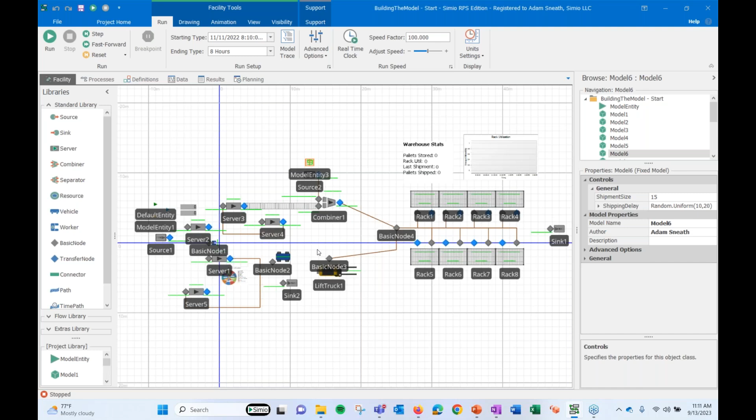Wonderful. All right, so we've got a relatively simple system here with some upstream processing activities, downstream storage areas with our rack objects, but you can see that I haven't done much to animate this. So some labels and status plots have been added. I'm not going to cover those today because those will be covered in our next solution series that Kiara is going to present. So I think they'll be a nice complement to each other, especially with the new chart designer features we've added.

So I won't cover those today, but I think you'll hopefully be impressed by the end of our session in just 20-30 minutes how different this model will look, because we're going to add animation to a lot of the objects, some of the entities, workers. We're going to mess around with the queues. So we'll do a lot here in not too much time.

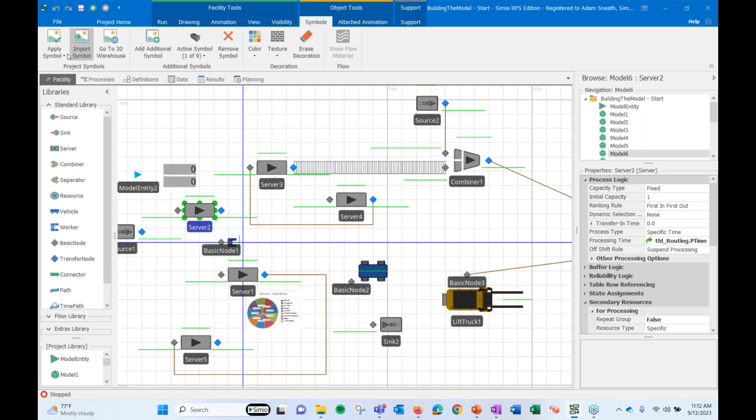So first thing I want to point out to you is these ribbons at the top, symbols and attached animation. You'll notice that those don't always appear, but when I click on an object, I see those appear. So to get us started, we are going to add some skin to servers 2, 3, and 4 from our built-in symbol library. Select each object, go to our symbols ribbon, apply symbol. We'll do a lathe, a mill, maybe we'll call this a finishing area, and then you can adjust the size of these symbols independent to the attached nodes and queues, so you can resize those as needed.

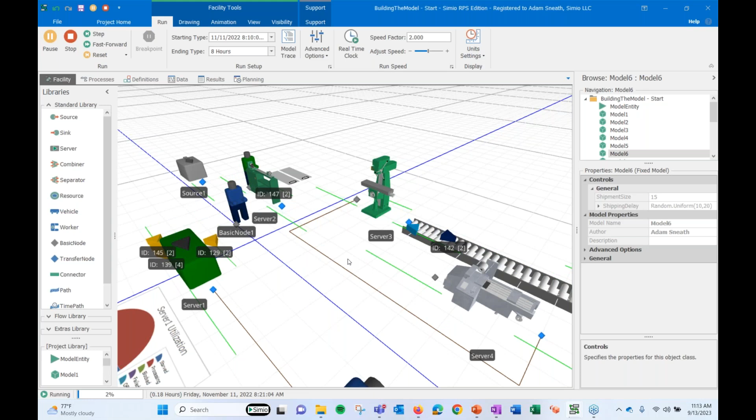So already just with a few clicks, we've gone from the gray box, the standard server, to a work area that looks like a machine or a piece of equipment. And to really illustrate this, I've gone down into 3D just by hitting the 3 key on my keyboard. So you can quickly toggle between 2D and 3D with the 2 and 3 keys. So now that we've got realistic looking equipment, our Lego block workers look a bit out of place. So next we'll take a crack at the workers and add some animation to them as well.

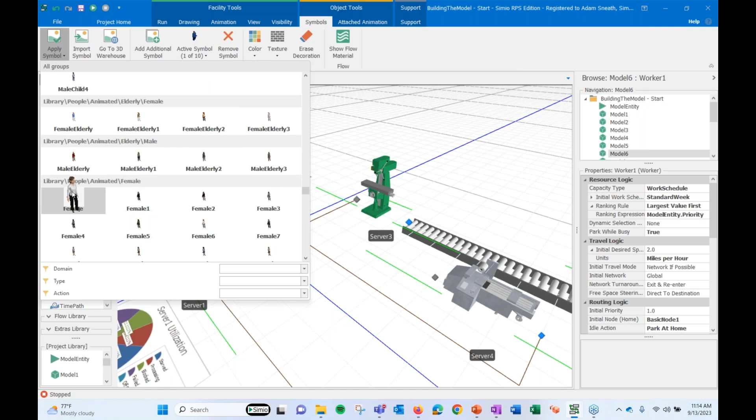So same workflow, I'll select that worker instance, use my symbol library, scroll down towards the bottom, and I want to point out that there are 2 flavors of symbols for worker objects typically. You have these categories that say animated, and then you'll have a larger category that's not animated. We're going to use animated, and I'll show you what the impact of doing that is. So we'll grab a human symbol here from one of those animated categories, resize it a little bit, and let's just run and see what happens now by default.

I can see the workers' feet are really moving while they're walking around. So that's the difference between those animated human symbols and the non-animated. Non-animated, they would just shuffle about without their feet actually moving. So the animated symbols are a nice way to get a more real feel for those workers moving around through the facility. And what are they doing in the model right now?

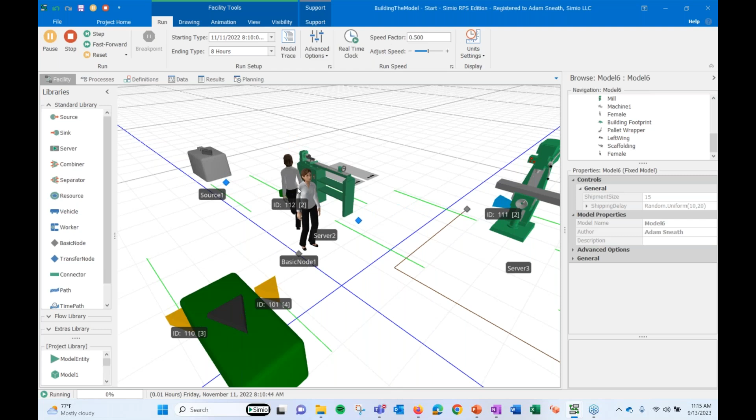So I have this server 2 set up to request move for those workers to the input node of server 2. I also am using an option called park while busy. That's really nice. So you'll see when more than one worker is required, they'll stack on each other. And I only have a capacity of 1 there right now. So let's change the capacity to 2. So now we can run 2 parts at a time, each part requiring 1 worker.

And I'm going to adjust now this parking queue on the input node of the server. There's this built-in parking queue, and I think this is a feature that maybe is not widely known about. So when I select that input node and hover, I can see: automatically animate the objects located in the parking station contents queue. If you wish to animate the objects somewhere else, turn off this option and use the draw queue option instead. So we're going to do just that.

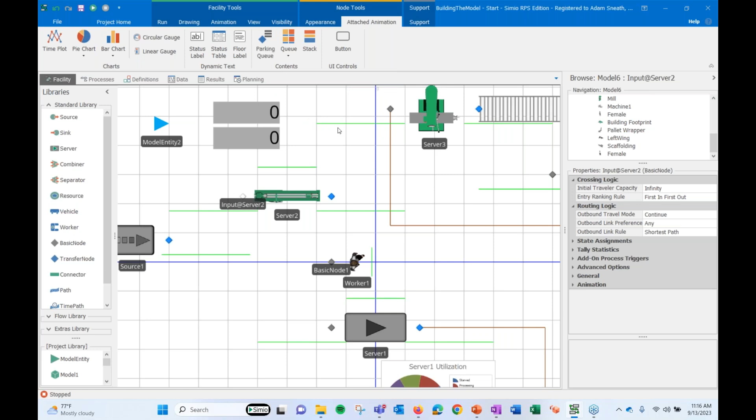You see it's gray when it's turned on. When it's turned off, it looks like the rest of the buttons on the ribbon. And I'm going to use the Queue button to animate ParkingStation.Contents. I'm going to draw this just above the work area. We'll move our labels a little bit out of the way. And I'm going to use the oriented point option for this queue, so I can control not only the position of, in this case, the workers in that queue, but also their orientation.

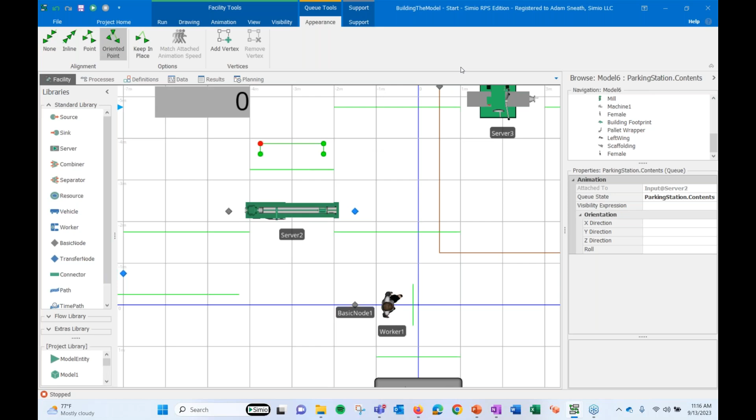Now we have a detached parking station where our workers will sit and face the workstation as they're working. Another thing I want to point out is this visibility ribbon.

We'll run the model in a second and see that result. But another thing you can do, if you feel the queues are detracting value from the look and feel or other things like nodes, you can toggle anything you want on and off from the visibility ribbon. Aptly named, it really just affects the appearance. You're not changing the physical or logical behavior of the nodes or the queues, just masking them from the facility view. So we'll leave them on for now.

Now we'll run the model and see. Kind of cool that our workers really now stand in the queue facing the equipment.

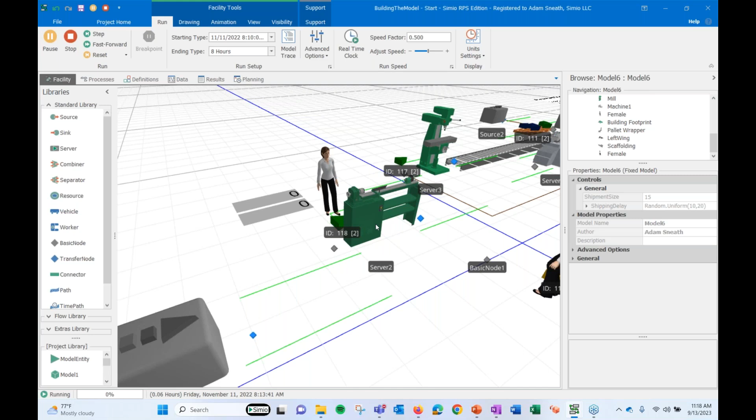That can be a really nice way, especially as you get into custom object development. You could save that object with that queue configuration and rapidly scale up your model. If there were 10 lathes, you wouldn't have to do those clicks for each one. Save this off as a custom object, and then you can replicate it rapidly and efficiently.

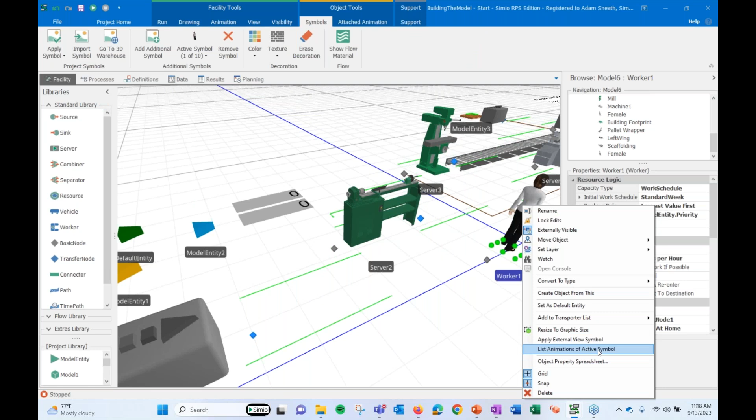All right, so we're making some good progress. Another thing I want to mention is that these animated symbols have assignable actions, or we call them animations. So if you want to get into detail as to what your workers are doing, maybe during different steps in a task sequence or at different work areas, you have these options that are assignable. You can do it in process logic with an Assign step, using these indices to create different actions for those animated workers.

All right. So next, I want to point out that if you toggle the H key on your keyboard, you'll see a number of these camera control or lens control options. There's a full help document on this with a complete list of these options, and I'll cover some of them as we go along.

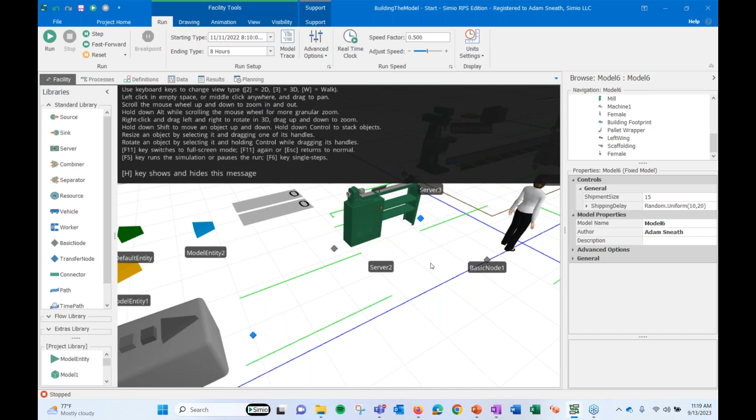For example, one thing you can do while the model's running is use the R key on your keyboard to create this rotating view. That may be a nice way to give a bird's eye view while you're starting your presentation, or at some point.

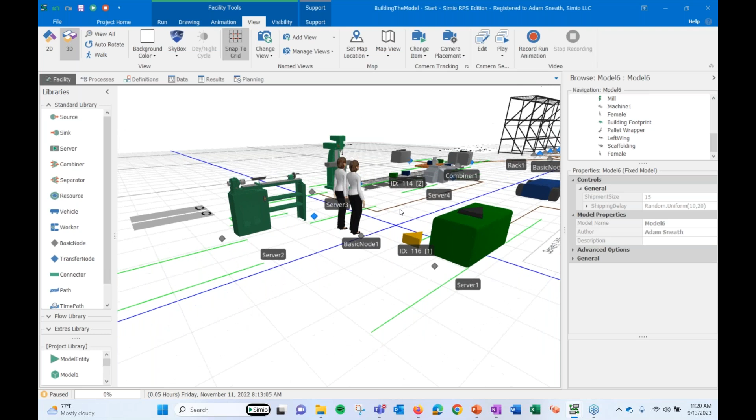Okay, so next I want to talk about a feature that I use a lot and think is really good, this idea of saved views. From the views ribbon, I have this category of buttons for named views. What you can do essentially is, once you've gotten your camera angled to a good position and you're seeing some of those toggles in real time, I can hold the control key and move up and down on this axis.

Once I've got it somewhere that I like, I can add this as a named view. I'll call it 3D upstream, and give it a hotkey on my keyboard. So then I can rapidly navigate through the model.

And I typically like to do a 2D overview as well, so we'll add a 2D overview. I'll map this to the O key on my keyboard, and now I can seamlessly jump around between those two views. I know sometimes over the screen share this is going to go a little laggy, but hopefully it looks as clean on your end as it does on mine. When you set this up, you'll see it's a pretty smooth transition. There's no limit to how many you can add there.

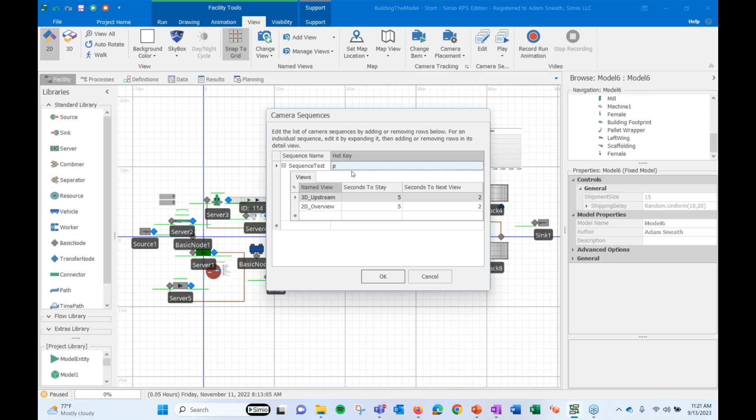And there's a nice companion feature to that where you can define a sequence of those moves. So you can create a sequence test with its own hotkey, and essentially what you do is specify the durations that you'd like to present each of those named views, or some sequence of those named views that you've defined. In this case, if I gave this a hotkey like P, when I hit the P stroke on the keyboard, I would spend 5 seconds on this view and 5 seconds on the next.

So it won't look like much with just two views. It'll sort of look like what we were just doing before, but you'll see that it transitions from one view to another, which can be pretty nice. Maybe if you want to make a recording, I think that would be a really nice feature, in sync with your talk track. You can spend as much time as you want in one area and then have the camera automatically move to another area using that camera sequence feature.

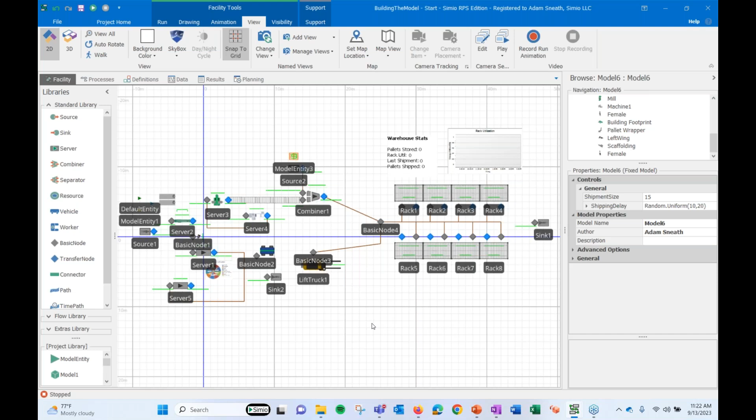Next, we are going to do a bit more with importing 3D symbols. So we'll tee up two scenarios here. I want to bring in a CAD floor plan, like a 2D floor plan, maybe a DWG file or a DXF file, so we'll do that first. And I also want to make this combiner look more like a pallet wrapper, a palletizing area.

Now, we'll imagine for the floor plan that I already have a file on hand, so we'll assume that we have a file. To bring it in, I'm going to go to Drawing, Import Symbol, and navigate to the folder where I have it. I'll select that building footprint, DWG in this case. And maybe if you know more about CAD than I do, you might mess around with these options, but I almost always just leave the default settings there, hit OK, and we'll see that import occur.

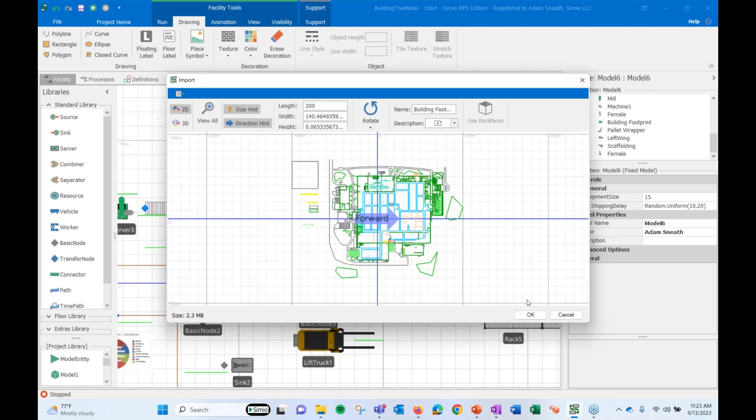Then I get this nice dialog to establish the dimensions of that symbol. This is a great way, I think, to start your project, because already you set this to scale, and then you have a clear canvas to build your objects on. So I won't spend a ton of time here to get this too perfect, but we'll just set up the racking near the shipping area and say that this is good enough for now.

Another feature that I want to mention is that when you bring this in, it's right on the origin, and actually the y-axis in Simio. So the axes in Simio are X to the left and right, Z up and down, Y you can think of as into or out of the screen as the y-axis, or in 3D, sort of up or down. So when I bring this in, it's on 0Y, so it can compete with other things, especially in 2D.

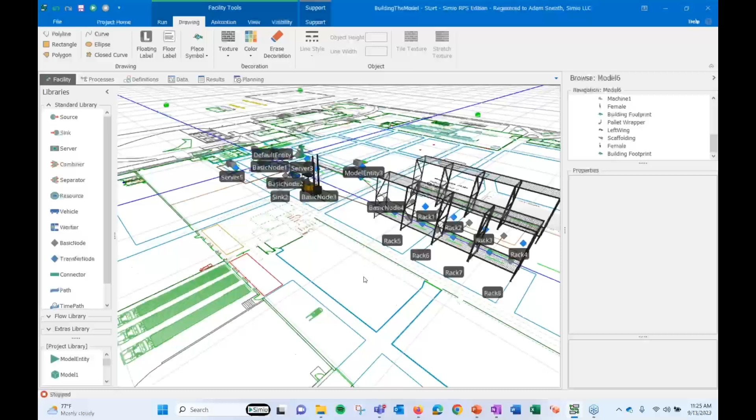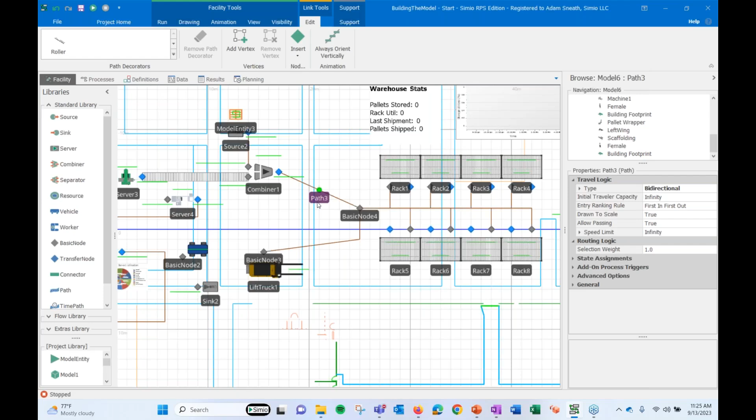When I try to click on other things that lay flat on the grid, it can compete with those clicks. So what we're going to do is go into 3D and hold the Shift key on my keyboard and just lower this slightly below the grid. The more opaque that it is, you'll be able to see the grid lines actually going over it. Now, we'll just lower it slightly on that y-axis, and then you can lock edits. So now I can click around and that symbol will no longer move as I click the mouse and move on it. And now in 2D, I can comfortably select other things that are sitting there right on the grid.

All right, so we've got our floor plan, and next we want to enhance our combiner to make it look more like a pallet wrapper, palletizing area. And again, maybe some customers that I work with have CAD groups within their organization, so they can outsource creation of 3D symbols. Some customers already have a nice library of them, but we'll imagine in this case we don't have a pallet wrapper symbol.

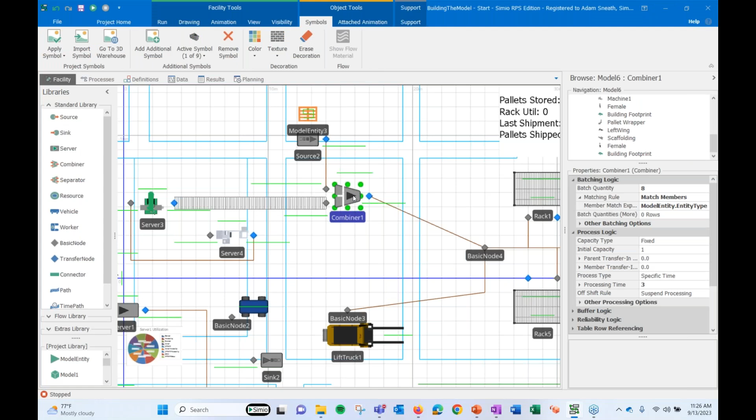So there's a really nice resource online that's free. We can use 3D Warehouse by SketchUp. In this case, we'll search for a pallet wrapper, navigate to the models tab there, and we can download a free symbol online, pallet wrapper. So I've already done that, and what we're going to do now is select our combiner to import a custom symbol.

So we're moving out of that standard built-in symbol library. We're bringing in our own custom pallet wrapper. Give this the right size, and select OK.

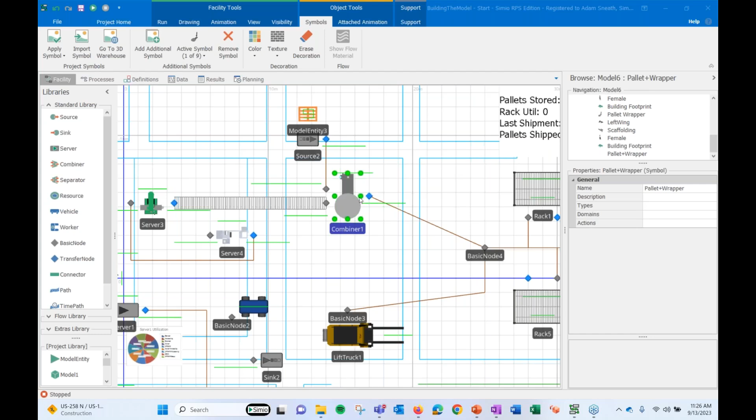Now, if you ever want to change that geometry, so maybe we have several pallet wrappers and you want its default geometry to be a different size, you can go back. I want to mention this because it's a little bit buried here in the navigation window. A lot of our clicks are on the ribbons or the tabs in the home screen, but when it comes to symbols, you can select the project here from the navigation window, go to symbols, or you'll see them here on the side. So navigation window is our hub. And then you can select that symbol, edit symbol, and edit its specific geometry to resize those initial dimensions if you need to.

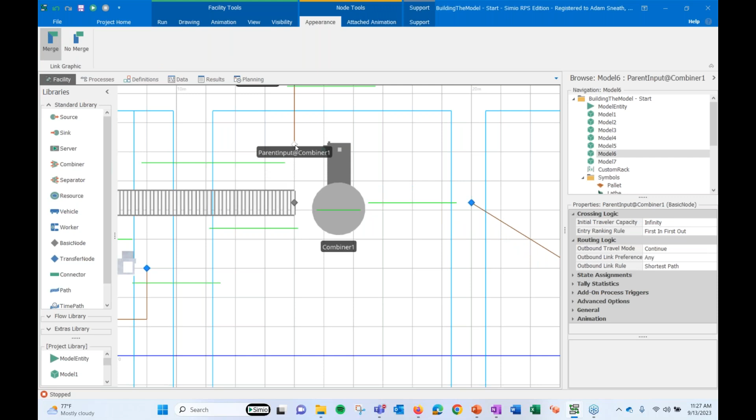We'll go back to the model. Our next step will be to adjust some of these attached queues to further bring this area to life. I'm going to bring the processing contents queue down and center it on the base of our pallet wrapper, bring the output node over to the right, maybe make this more like a staging area, and bring my input buffer onto the conveyor.

So let's see what we did, see if we made any mistakes. I feel okay about it so far. We'll speed things up a little bit and see if we can start building some pallets. You see them being built up gradually in that area where the pallets are staged. Then we're ready to wrap - they move onto the deck and then take off. So without doing a lot, we've nicely enhanced the look of this area. This looks fairly realistic just by doing a little bit there.

Maybe what we'll do while we're here is add another view. We'll call this pallet wrap and give it the X key on my keyboard.

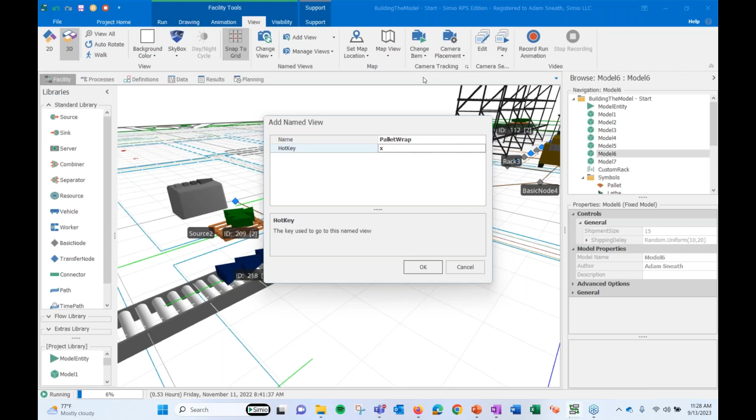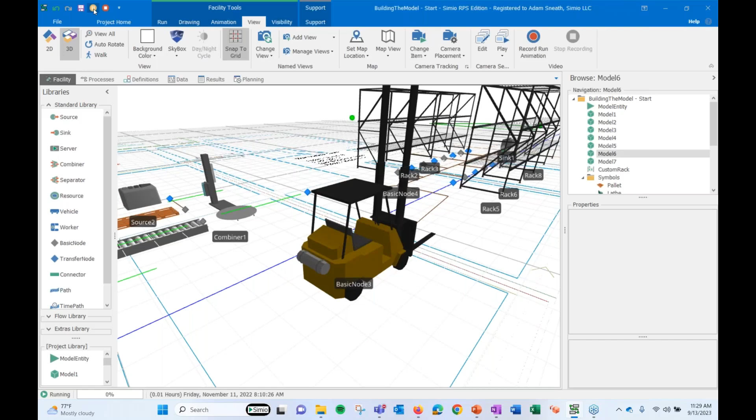This next feature is really sort of fun. What we'll do is select our forklift. This feature applies to anything that moves about through the model, such as workers, entities, or vehicles in this case. While the model is actually running, we'll right-click and toggle this trackable with camera option. It's already toggled on, but if it were off, it would look like this. We'll toggle it on, and now we can use these camera tracking options. I just think this is really cool, and maybe not widely known.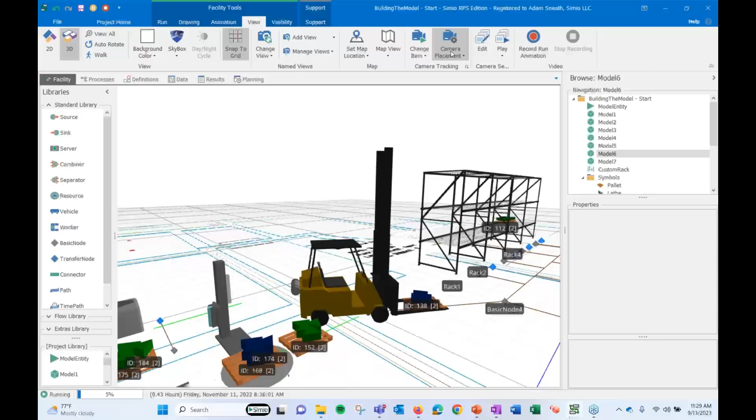Give this a second to run until our forklift does its first move, and then we'll look at the different options for tracking along with this object. I saw a really cool model of a roller coaster that actually took you on a ride by following behind the entities. So you can use follow behind, watch from a distance - I'll try that one so I know how to look. Oh, pretty cool too. Really like these features, and you can switch between different objects. That's just sort of a fun, nice to have feature as well, that maybe you didn't know about.

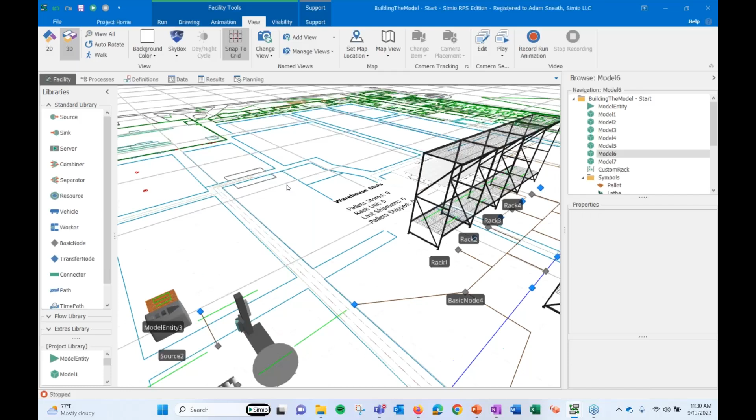Good deal, so we'll use our hotkey to zoom back to 2D. Next we're going to do a bit more with static symbols, so I think you'll enjoy this. What we're going to do is bring our products down here a little bit. We're going to create a little more runway in server 1, this server 1 area, so we'll bring this down, just create a little bit more space for ourselves. Put the home node for the workers over here; the worker instance I can kind of stash somewhere else on the side just to get them out of the way.

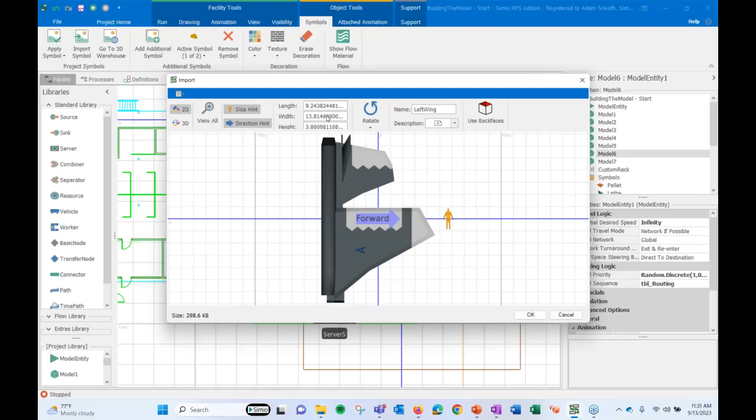Instead of just the triangle, I'm now going to import another symbol for my entity. So I go to Symbols ribbon, import symbol, and we're now going to build airplane wings. You can see a bit more of what I can do here - I can sort of rotate it, I can stand it up along either axis. I want to have just the flat side facing up in this case. Again, none of this is set in stone - you could always go back and adjust if you need to.

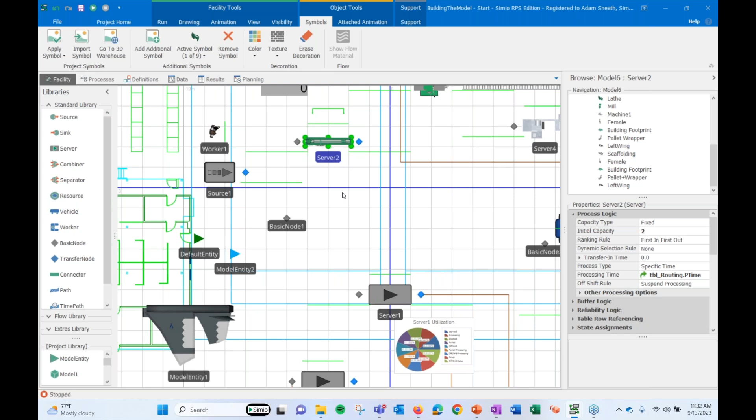So we are also going to add some scaffolding. This will be our first, what I call a static symbol - well, actually, our floor plan was our first static symbol. So we'll be adding another static symbol, meaning it's not attached to anything and has no intelligence, so to speak. Simio is simulation with intelligent objects. A lot of what we've done so far is animate a server, and in doing so, we haven't changed its behavior - its intelligence still has the same brain, but we've given it a different outfit. The static symbols are purely aesthetic; they have no function in the model. They're just a symbol. I'll show you how we can always tell whether something we're looking at is an object or not.

But first, we're going to bring in this scaffolding. We'll give it a made up, say 5 meters, and bring this in. You'll notice that when I click on that symbol, I don't see any properties, and that's how I can tell the difference - there's no object type next to that properties indicator, whereas the servers say properties of server object.

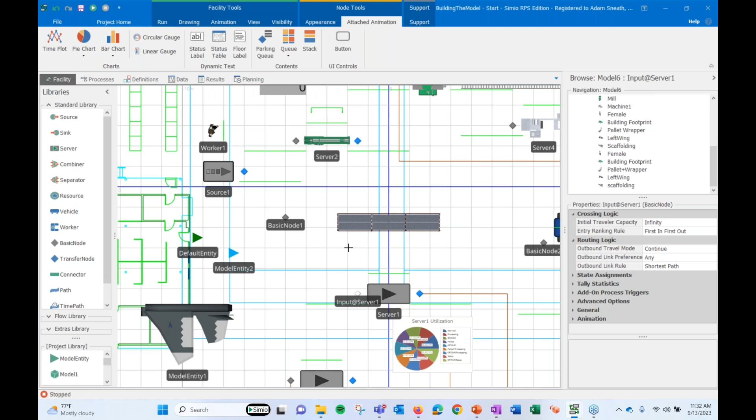Next, we're going to animate the parking queue again, but with a bit more flair. I'll add a parking station contents queue here. We'll do an oriented point again, facing the server, and add another vertex.

Note that when you do this oriented point queue, if you had more than, in this case, 3 things in the queue, you wouldn't see them. So with this type of queue, you have to be mindful to add enough vertices for the maximum number of things that could be in the queue, or you won't see them. If there are more than 3 there, we wouldn't see them.

I need to adjust my task sequence a bit. I want to say that 3 workers are required for these tasks. We're going to need to add more workers so they can keep up. So we're doing a bit of modeling here too, just some quick changes. We'll say there are 5 workers, should be enough.

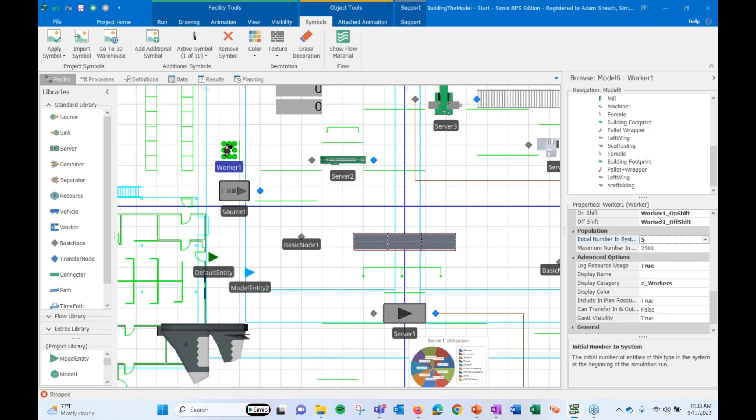Now what I want to do is move this whole queue up in 3D. I do that by holding the shift key and moving it up and down in 3D. I can do that for individual vertices as well.

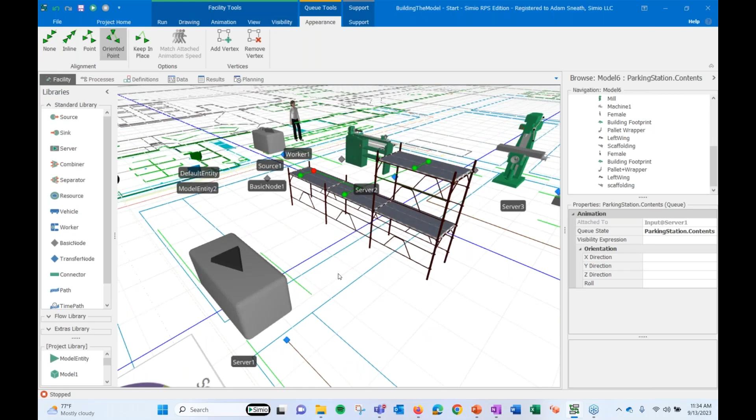And then you may have guessed what we're going to do. I'm going to place this on the scaffolding, so effectively we'll see our workers standing on the scaffolding, which will be pretty neat. I'm purposefully going to skip one step so we can see what happens.

Interestingly, we see our workers, servers seize, but where's the part? Looks like we're not doing anything. So another feature to be aware of, and this tricked me a few times, is...

You may need to resize your processing queue or your input buffer. As you make things bigger, as you make your entities bigger, they can get hidden in those default queue sizes. So just make sure as you make things larger, you also increase the size of queues to accommodate them.

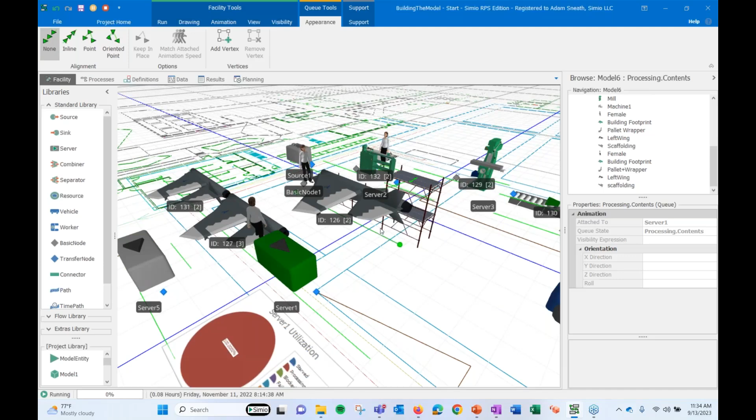So again, this is just a silly example here, mainly to show you the capabilities. Maybe while we're here, we'll save a view, and we'll call it 'plane wing with C'.

But yeah, some really nice features there. You could imagine perfectionists could take this to the nth degree, just by knowing how to work with these queues, bringing in static symbols. You can do a lot to mimic the real appearance of the system.

And already we've got a pretty nice model here. I mean, remember where we started? We've done a lot to make this feel more realistic, more engaging.

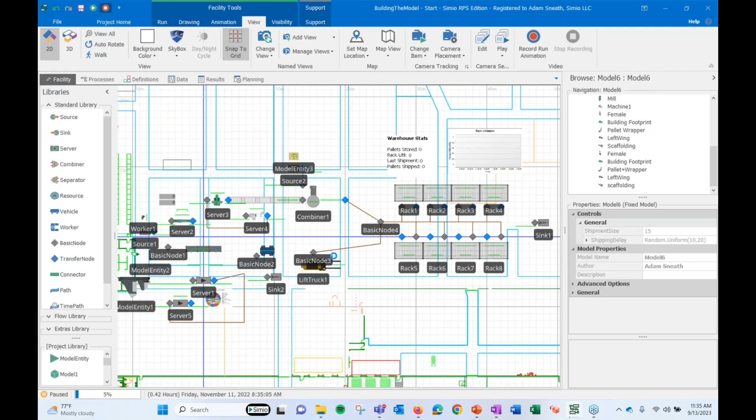Okay, last one's kind of a bonus. I'm not sure it's purely an animation feature, but I think it's pretty neat and definitely can affect the appearance. So bear with me for a second here.

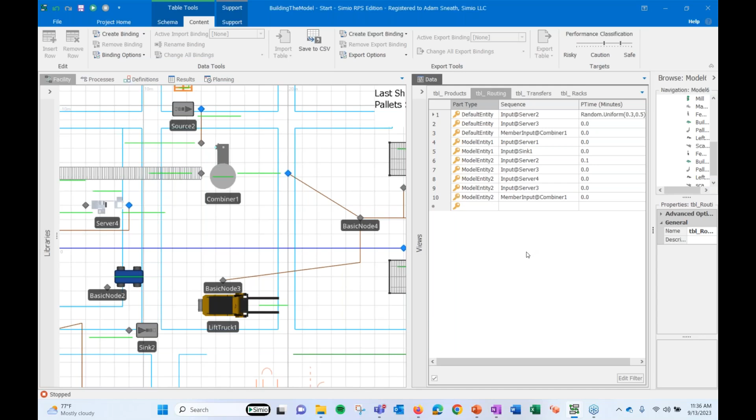When I do this, we're going to auto create links with vertices, with the goal of creating a curved travel path, or a travel arc. You could do this manually, but you'll see why auto creating has its benefits. It's more efficient, easier to maintain and scale.

So to do this, we're going to get rid of path 3. You're gone. And add a new data table, call this table 'links'. I'm going to add an object property column and 2 node property columns. I'll call this link name, start node with a lowercase t please, and end node.

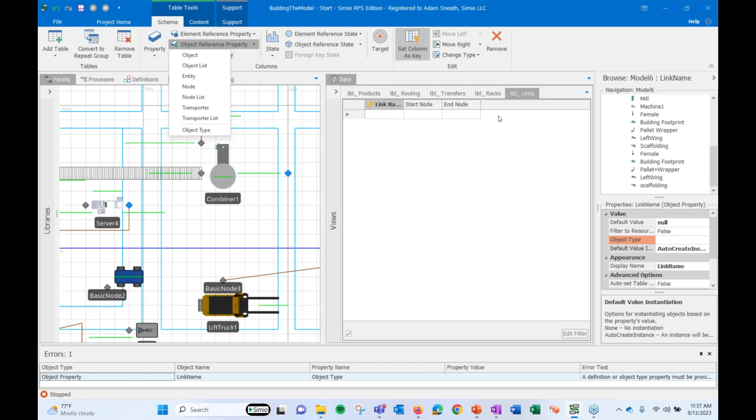Make this a primary key to indicate it's a unique identifier, or that the entries in that column are unique identifiers. If you've done auto create before, you know we have this special type of column I could add to specify object types, like these rows should auto create a server specified there, or basically for each row auto create the type of object specified in that special column. If I did that, I would map this entry to that column name, but for now I'm just going to say everything in this table is going to be a path.

To actually do it, I need to map the properties of this column to the other columns in the table, and I do that with just the column name syntax. Since I'm within this table, I don't have to do table name dot column name — it recognizes that I'm looking within this table for this information.

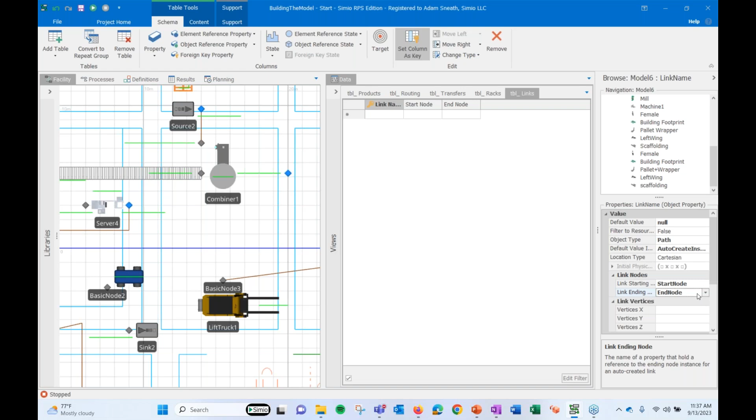And let's see what happens. So I usually start typing into the cell to get close to what I want. Then maybe I'll use the arrow keys on my keyboard to finish it out. And voila, once I give it a starting node and an ending node, it is created between them automatically.

The benefit of doing this is that you could be clever, or maybe write some code to build out rather large networks pretty easily. Maybe you're modeling a warehouse and you want to model your transportation lanes and your different travel paths throughout the warehouse. You could automate this data creation if you write some code or do something clever, maybe in Excel with a macro.

And to take this one step further, we talked about this idea of a curved path. We're going to add a table called table vertices with a foreign key property and 2 real properties that I'll call X and Z. We'll give these units of meters. And we'll call this link name as well. I tend to give my foreign key columns the same name as their primary key.

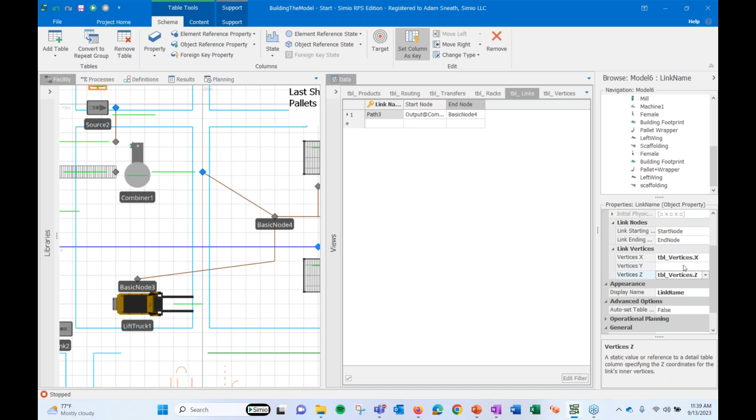Now remember that a foreign key is many mapped back to 1. So for each link, I'm going to define potentially several vertices. And to do that, I need one more mapping here. Now that I'm going to another table, I need the table name.column name syntax that we're using here. Okay. So now I'm telling the auto-created paths to reference this other table for their vertices. Finally, I need to set up my foreign key with the primary key table key property.

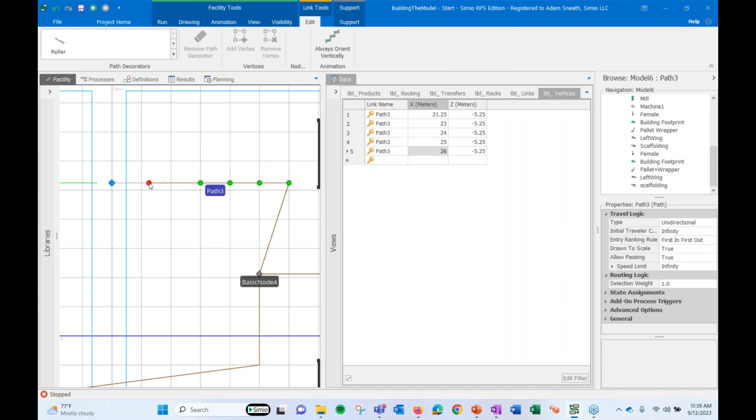And now when I drop that in, the default values there, 0, 0, I get this vertex over by the origin. And then, in this case, we'll just copy paste a handful of them. Maybe start to give them some offset there. And then click and drag, and you see the coordinates in the table update as well. So pretty neat. If you have any sort of curved conveyance, maybe there's an obstacle there that you want to avoid, you can do that through auto create.

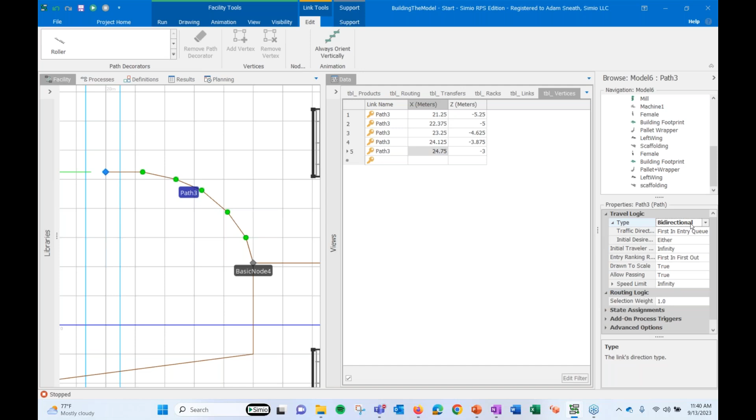And remember that when you auto create, you need to come back and reconfigure, unless you're auto creating a custom object that has saved non-default values. So basically, before I deleted this and recreated it, it was a bidirectional path. So now that I've auto created it, I need to go back and set it to bidirectional. I could also save this as a custom path, create object from this, so that each custom path is created with bidirectional automatically. If you have questions about that or you're not familiar with that, just reach out to us. It's generally called subclassing objects or custom objects, really great features as well.

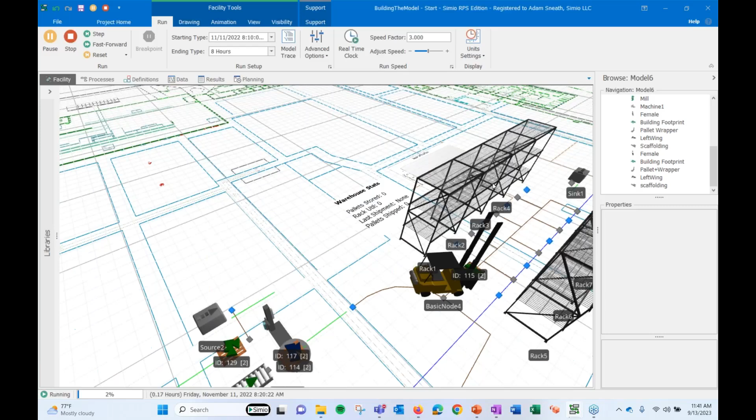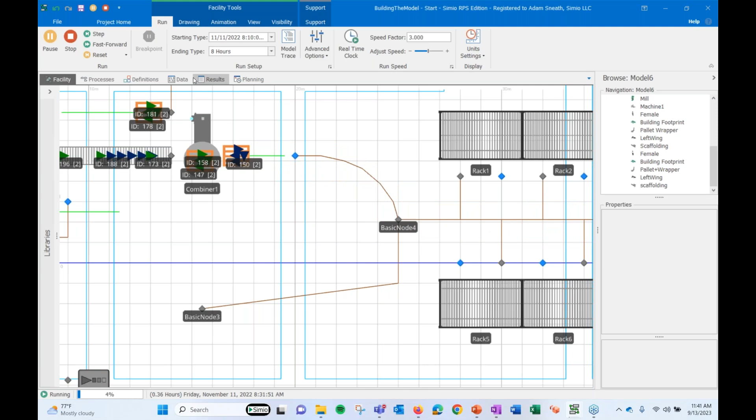So let's see, can I remember the hotkey? We want X for our pallet wrapper area. We'll bring the data tab back in, and let's see how we did. So once we build some pallets, we'll see the forklift now travel on this curved arc. So pretty cool. You could really do a lot with this. And again, it's in 3 dimensions. So if you had some sort of spiraling conveyance, maybe coming down from one floor to another, you could do that all by just getting the coordinates right. Or again, doing something clever with code or Excel to generate that data.

All right, and we're getting pretty close to close here. Just a few bonus topics. Another thing you can do is use the skybox feature from the views ribbon to add a backdrop. In this case, we'll add a warehouse backdrop. And again, just remember that you have a lot of those options to control the look and feel. So, control and scroll on my scroll wheel will go up and down like that. Shift and scroll will take me up towards the roof. So that can be pretty neat, or back down to earth.

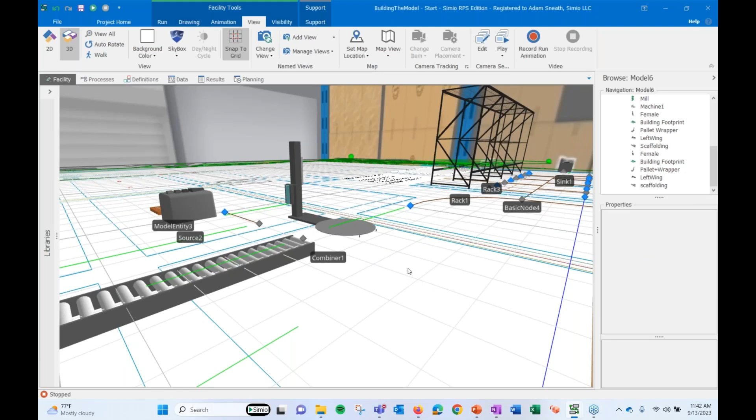And remember that we didn't cover today animation, status labels, and charts, because Kiara will be covering that in our next solution series. But hopefully you enjoyed this. Hopefully you can apply these techniques to some of your models to really make them sing.

For now, that's all I got for you. We'll just mention, for further learning, reach out to us. We've got good training resources online, also good help documentation in the software, so auto creating paths, for instance, is a SimBit. So if you wanted a refresher on that, search the help doc, search the SimBits for auto create paths with vertices. So a lot of good resources for you there for further learning.

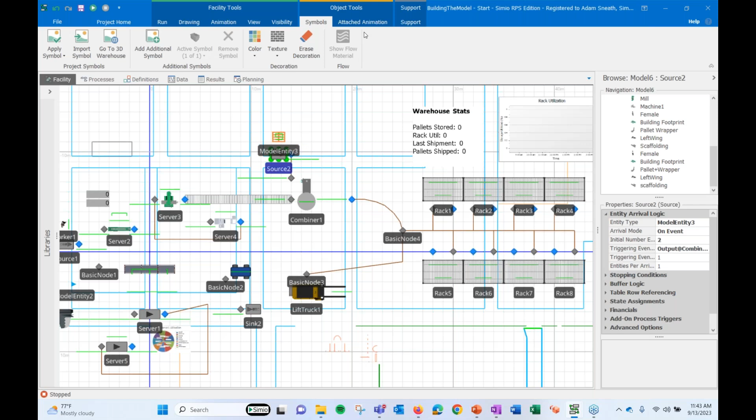So Adam, how do you access attached animations versus standalone animations? Good question. So we'll go back to Simio, and just definitions, right? Attached means that I've selected an object first and then applied animation to that object. So it's attached to that object. And when you ask how do you access them, well, by selecting that object again, checking out the symbols ribbon, you can see how it appears for the different resource states.

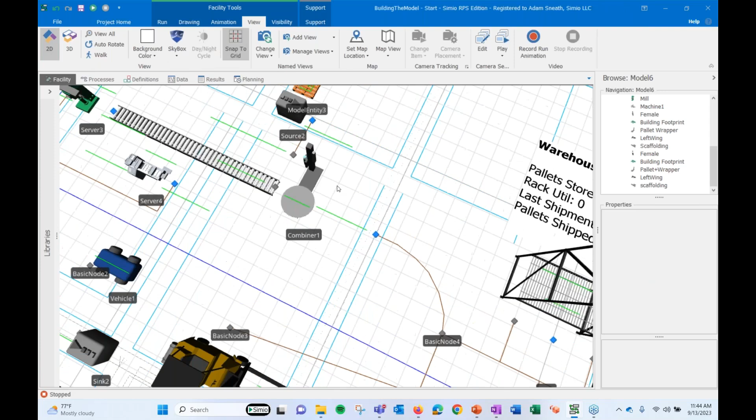So sometimes if I have failures, I'll further manipulate that attached symbol. So I'll switch to off shift or that failed state, and then maybe add some coloration, sort of like the default server, right? The default server turns green when it's processing. So the short answer for attached is by selecting that object again, right? Now the symbol is just a symbol. So the symbols I can access from the navigation window to resize them, do whatever.

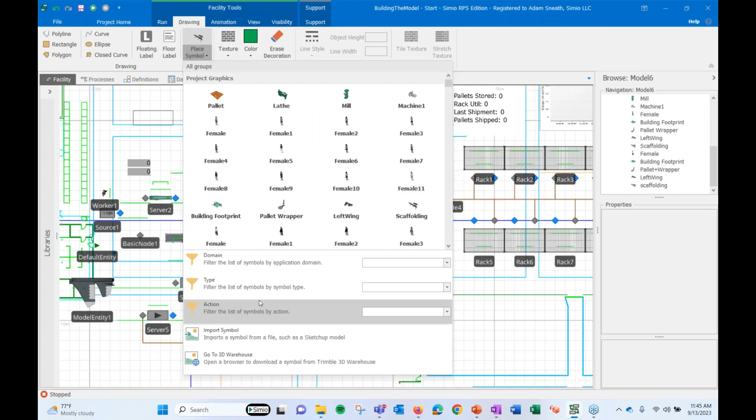The static symbols, again, just by clicking on them in the facility view, you can access them there. And to create them, you just click in free space from the drawing ribbon. You import that as a static symbol, like our floor plan and like our scaffolding. So hopefully that gives some clarification, addresses your question.

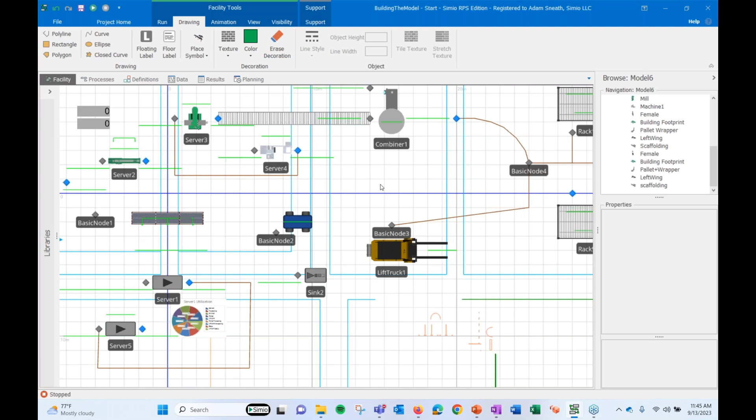Adam, can you have a path speed column as well? So if different entities use the same path, they reference that column to see what speed they should move. Yeah, awesome question. Getting on to what we call data-driven modeling. And the answer is absolutely yes. So a nice way to think about these auto-create tables is each row is analogous to the instance of that object. So in a non-data driven model, we're hard coding stuff on these objects. We're saying the speed limit of this path is 3, the speed limit of this path is 5.

But then I don't really have that in front of me. I did also want to mention the properties spreadsheet, which is a nice way to get that in front of you in a tabular view. So now I can see all my paths. I can also use this to multi-select things. So if you have an action you want to do on all your servers or objects of a certain type, I want to mention the property spreadsheet. I think this may not be well known.

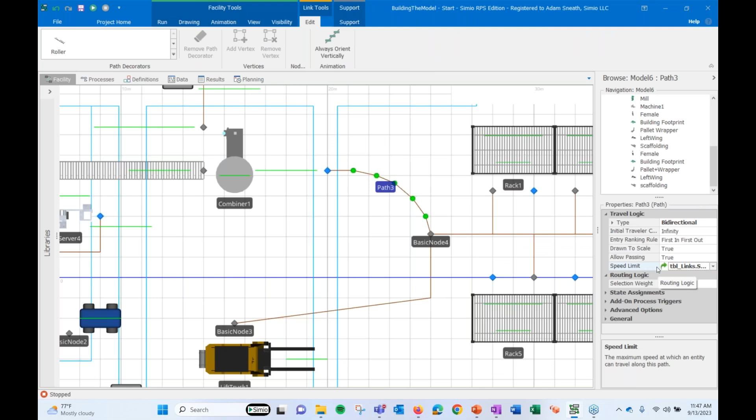But in a data-driven model, I'm going to create a real column, speed limit, and I'll try and be expeditious here about my answers. But you can map those properties. When you do that, you need to make sure to also set auto set table row reference to true. Best way I can describe this feature is that when you establish this reference column, it's like a pointer to that object. It's a one-way street. This is pointing at path 3.

Now for path 3 to get something back from that table, it needs to know which row we're talking about. So that feature automatically establishes for that path object a reference back to this row. So then it will read its speed from the table and any other attributes that you want to map to that table as well. Recommended best practice, data-driven modeling for sure. Great question.

All right, next. Adam, what are the file types supported for importing external symbols, whether they be 2D or 3D? Yep, so you've got a slew of them, and you can always refer to this import dialog, right? So other common ones are STEP files, might come from a SolidWorks, stereolithography STL files I've seen before. So shortest answer possible there is go to Drawing, Place Symbol, Import. This drop down here will give you the complete list of supported file types.

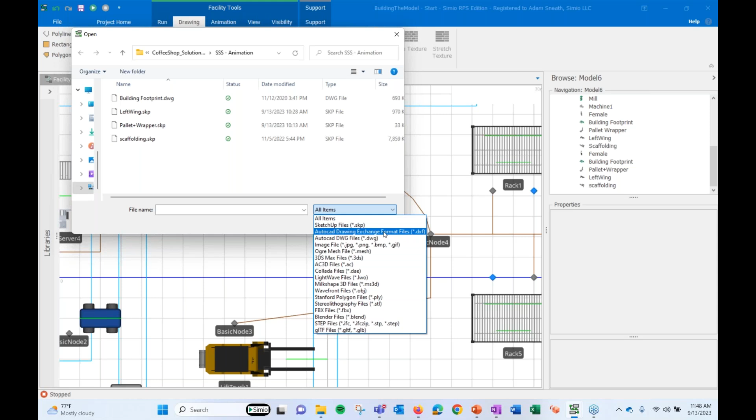And usually the CAD tools give you an option to convert. So if something you're working with maybe isn't one of these, you can usually export as or save it as one of these to convert into something. I usually prefer SketchUp if I can. I try to use SketchUp.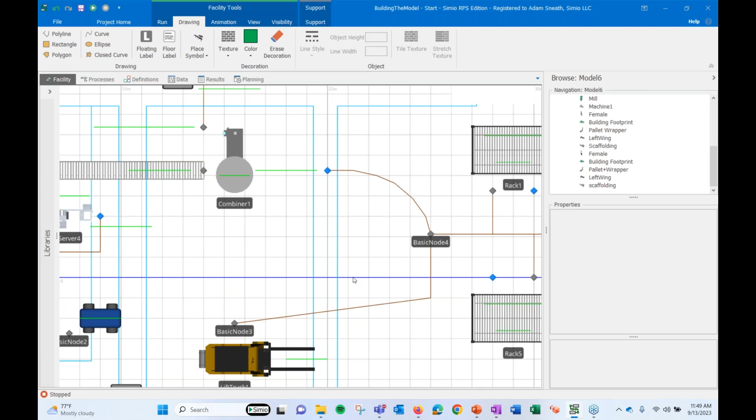All right, perfect. All right, can you rotate symbols in all directions? For example, and this is just a simple example, could you flip a person on their head? In other words, can you rotate? So someone's doing a handstand, pulling something off of a rack, I guess. Yeah, definitely. So that's a good question because I didn't really cover that. So you can rotate objects in the facility view here by grabbing a vertex and holding the control key. So obviously that's not really helping in this case, but you can do that.

For yours specifically, right? So you'll notice that when I add even standard symbols from our built-in symbol library, they show up here as one that I've sort of added into my model. So yeah, you can absolutely go in, edit the geometry of that symbol, and if you wish to stand up along X or Z, looking pretty silly, but now we've got our person doing a handstand. There you go. So, yeah, absolutely. So just using those features.

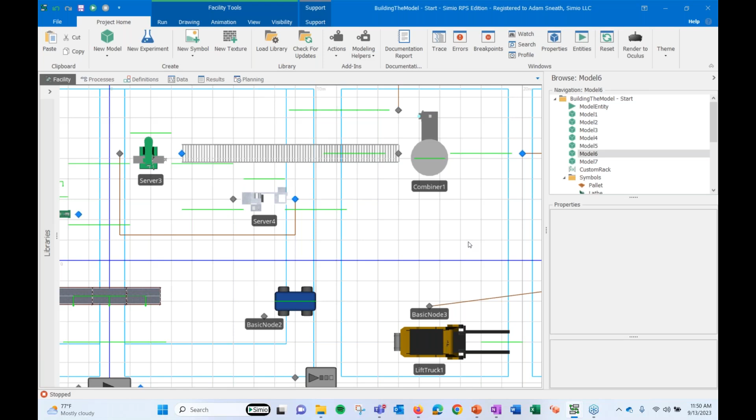All right, great. With a custom object, would you prefer to send a worker to an input node and animate the queue as you did, or add an additional node to the center of the lathe and just send the worker to that node directly? Yes, good question. So I'll just talk about some considerations there. Either one is fine. I usually just use the input node because it's convenient.

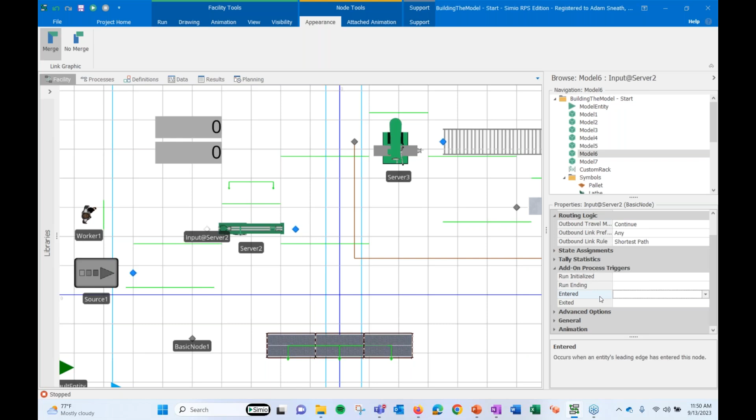Sometimes when it may be inconvenient, not necessarily inconvenient, just an extra step, is if you have OnEntered process logic on that input node. Technically what happens when the worker comes over to park there is it enters the node as well and will try to execute that logic, but most likely you want this logic to just apply to your model entities. So you can mitigate that with just a simple check up front using this function called Is.ModelEntity. So when something kicks off this logic that is not a model entity, it will basically just false out.

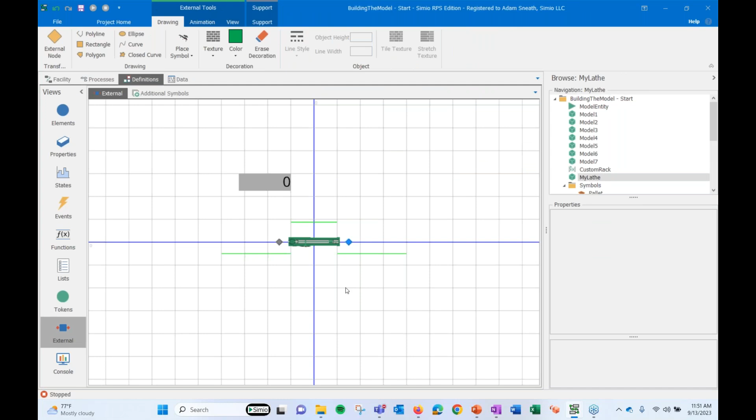So to avoid this, you could, yes, add a node. And let me show you how you would do that for others on the call. So let's create a custom object from this. We'll call it MyLathe. Head inside that object's definition from the navigation window. You can go to the external view, and this is where you could further sort of pre-configure it, right? So maybe you want to add that ParkingStation.Contents. Maybe you want to add an external node.

So I can add an external node right to your point and say that that's maybe a basic node, and then I could animate the contents of that node, right? So I would type Node1.ParkingStation.Contents here. So now when I pull my lathe, I've got this pre-configured object. So yeah, I don't feel strongly either way, but it's a good point that you can do this for those who maybe didn't know that. Good question. All right, great.

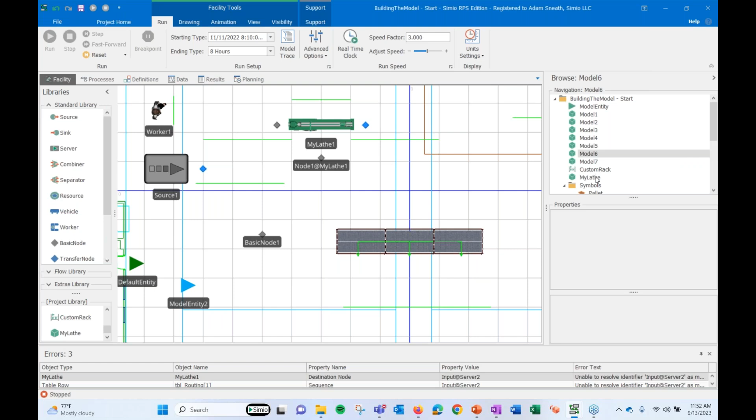Adam, are you able to add properties to symbols to change the dimensions of unique instances of a symbol? So let me make sure I understand the question. So I think you're referring to sort of the physical characteristics is how I interpret that question. So the physical characteristics, I would say, are best manipulated using either that property spreadsheet, right? So if you wanted to resize your rack objects, sort of in bulk, you could do that through the property spreadsheet.

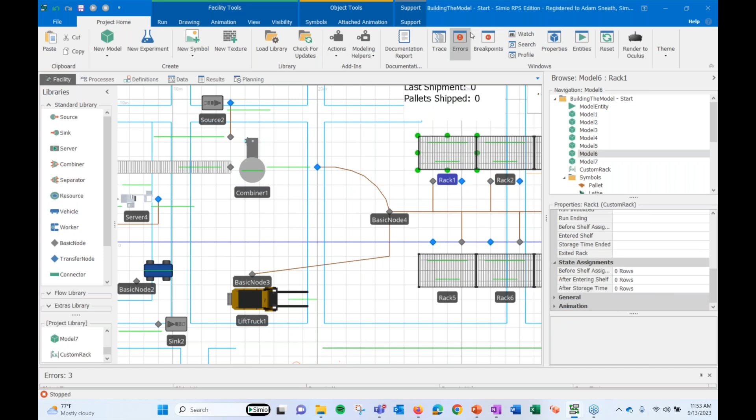You do have as well, right, if you're auto creating them, sort of initial physical characteristics, right? So yes, sort of similar to what we've done with the other attributes, you could initialize those physical characteristics from data table columns. So yes, you probably want to be auto creating your objects if you're looking to do that, initialize those physical characteristics from data, and here is where you would establish that. Yeah, good one.

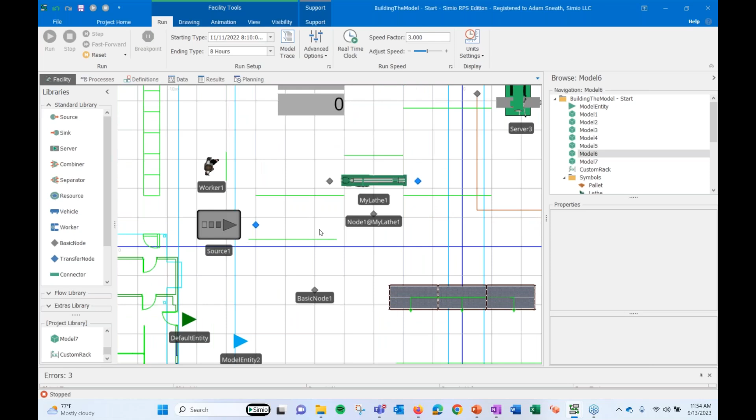All right, let's make this our last question because I think this might be a little bit of a longer answer, but let's see. Suppose there are many entities in a queue, and each individual entity has many attributes. In this case, can Simio only show entities that have a certain attribute? Yeah, that's a neat question. So what you can do is, it makes me think of the visibility expression options.

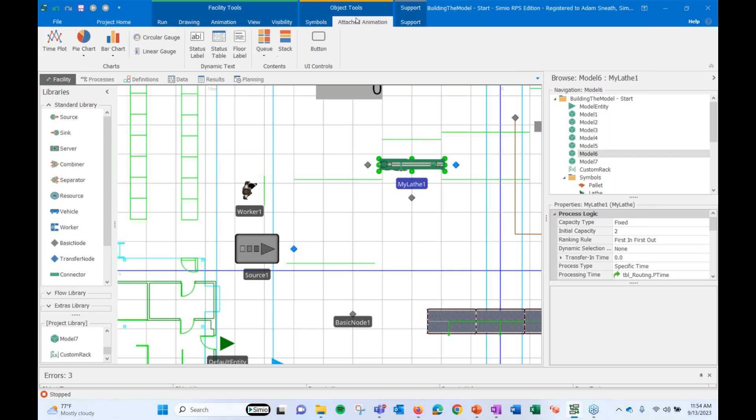So one thing I've done before, right, is if I have like a mix, I've got my labels all confused because I switched to custom lathe, but let's say you had a mix in this input buffer, and I want to add a few more. So let me do input buffer dot contents. So now I have 2 input buffers, and maybe I can go to this one where I'm building the model test. Bear with me for a sec. All right. Yeah, so I wanted to just be able to run it so we can actually see this. So we'll add that queue again, input buffer.contents.

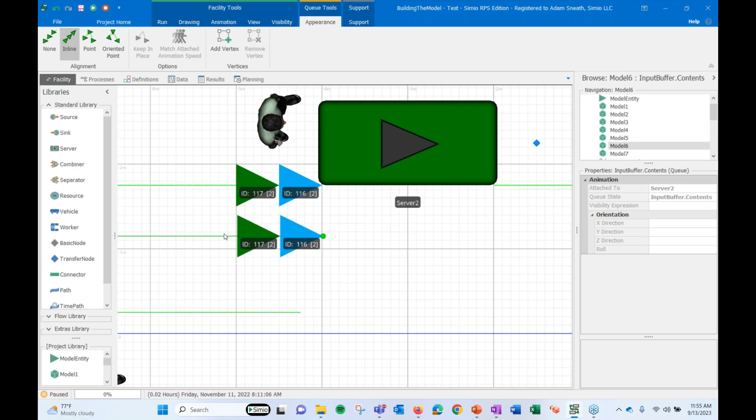And what I think you should see is now duplicates, right? So there's not 4 entities, really just 2 entities, but I've created sort of a copy by just copying this queue. But yeah, absolutely, you could use this visibility expression. So my whole point here is if you want blue ones to show in one queue.

The queue is logical in the sense, right, that it has a capacity. So it has like a logical capacity, but it can also be sort of physically representative of like a staging area when we put the queue on the conveyor over here. So maybe you've got lanes in front of the server where you're slotting different products. Make a few copies of the queue, use the visibility expression here, and just take note of the tooltip for sort of the how-to, right? For example, the expression Candidate.MyEntity.MyState greater than 1 will only show the blue ones, or only show the green ones, right?

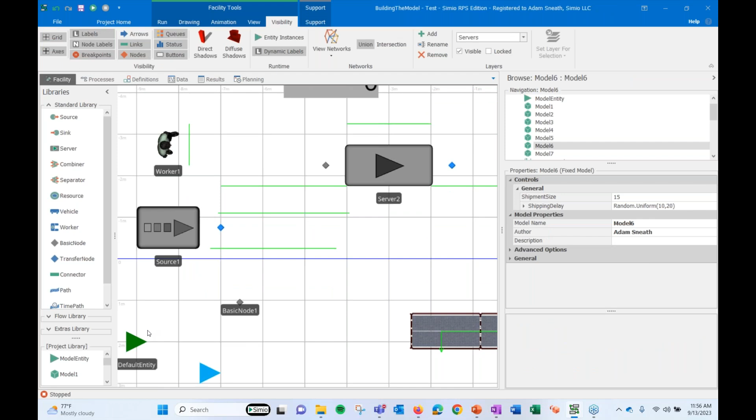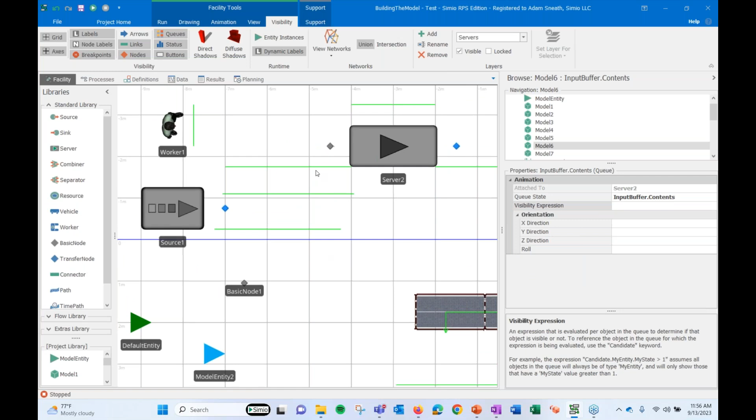And I think maybe I could do like Candidate.Is.DefaultEntity. But you get the idea there. Yes, you can do that. And I've done it before using that visibility expression.

Okay. All right, actually, one more quick one, Adam. Can you put labels on the XZ axis? On the XZ axis. Yeah, so the XZ axis is sort of the flat, right? So this technically is a label on the XZ axis, but if we're talking about the Y sort of going up in 3D, let me show you another thing that I've done before in models. So when you go into 3D, you can't really see that floor label so well anymore.

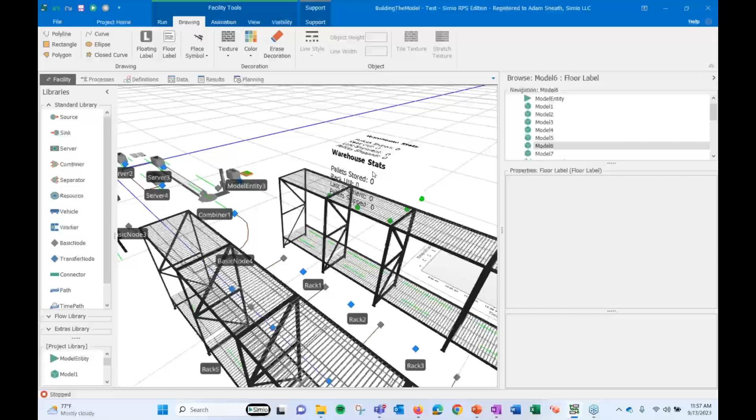What you can do from the drawing ribbon is give it some height. You have to sort of mess around with this to get it right, if you want it to be sort of rectangular, right? So now I've got that. There you go. Label with some height. Perfect. Pretty cool. Great questions.